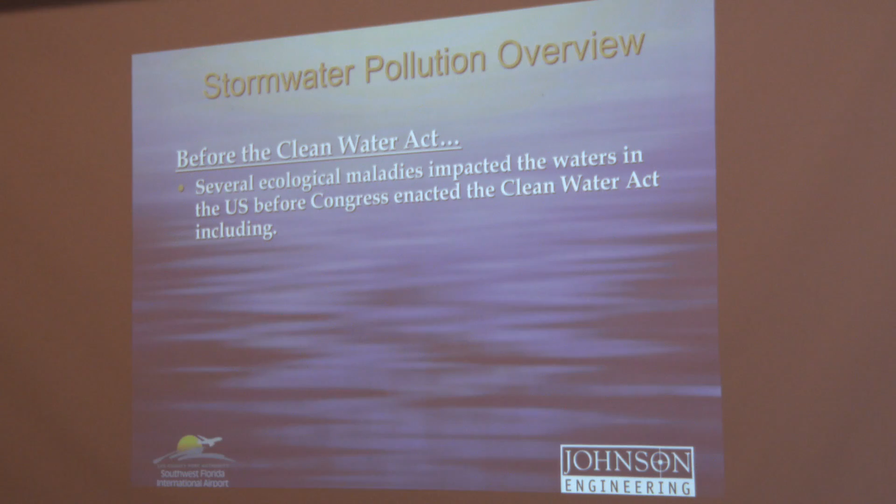Before we jump into the rules and regulations of the Clean Water Act, I'd like to look at a few reasons why it was enacted in the first place. In the years before passing the Clean Water Act, several environmental mishaps occurred which spurred the creation of nationwide water quality laws.

First up, we had kids playing on the beach. Typically, you don't find kids playing on the beach that big of a deal, but in this case, they were running through the fog of DDT sprayers. And in 1968, the U.S. Bureau of Sport Fisheries measured DDT in 584 out of 590 water samples that they took.

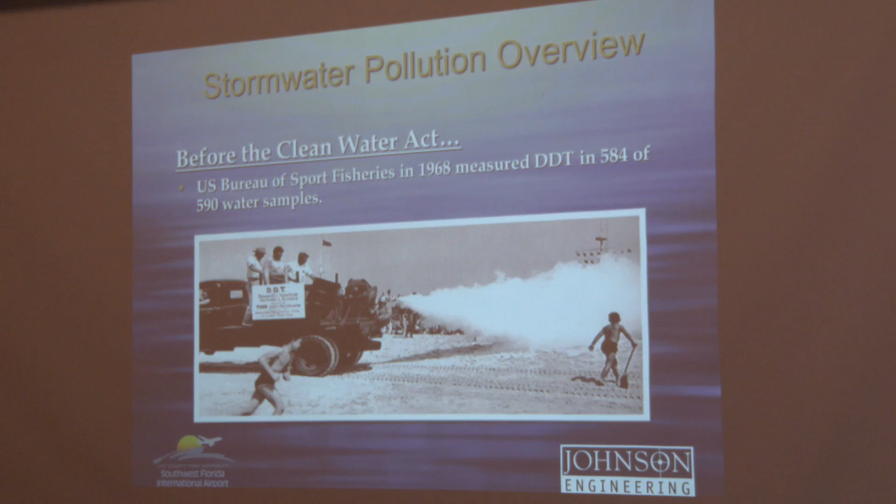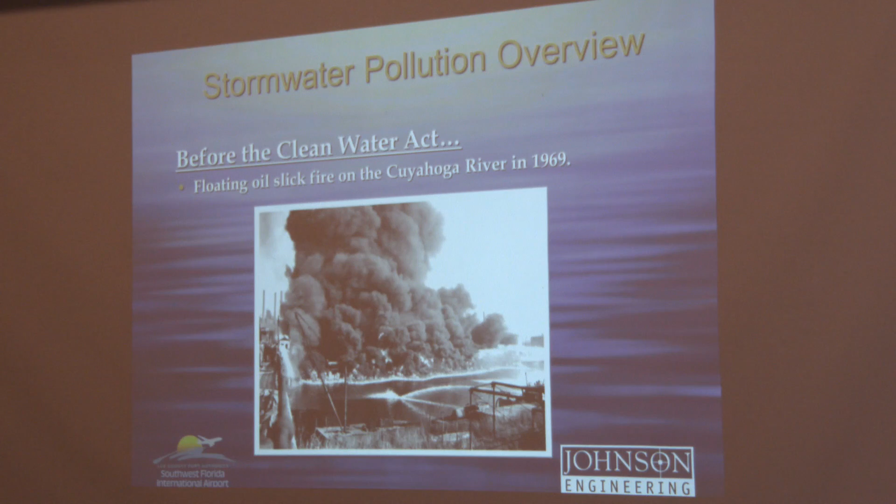In 1969, a river caught fire up in Ohio, the Cuyahoga River, and nobody ever likes when the river catches fire. This floating oil slick burned pretty hot and was one of the big instances to push the Clean Water Act moving forward.

Also in 1969, there were a record number of fish kills measured, including over 26 million killed in Lake Thonotosassa, Florida.

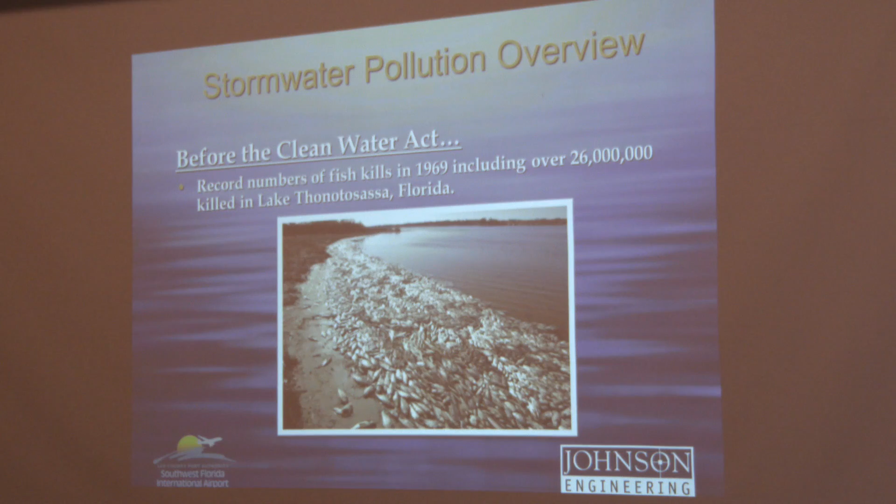And then finally, the Department of Health, Education and Welfare reported that 30% of our drinking water samples in 1970 had chemicals that were exceeding the recommended limits.

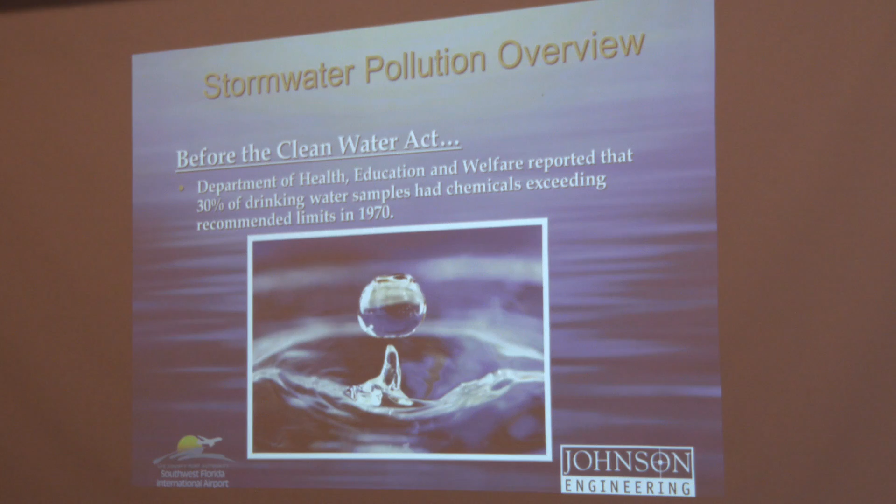So those mishaps set the parameters of what the U.S. did not want for its waters. And in response, Congress passed the Clean Water Act of 1972.

Section 402 of the Clean Water Act authorized the National Pollution Discharge Elimination System, or NPDES, to regulate point source discharges of pollutants. The NPDES performs its duties by requiring permits for industries to discharge stormwater into the waters of the U.S. It's important here to draw attention to the term waters of the U.S.

This is a very broad term that includes streams, lakes, rivers, sometimes ditches, sometimes even stormwater management systems inside a facility. Very broad term, and that's kind of an important factor that will play in as we move forward.

And then in October of 2000, the EPA authorized the FDEP to implement and enforce the provisions of the NPDES program. So now it is a state-enforced program instead of a federal enforced program.

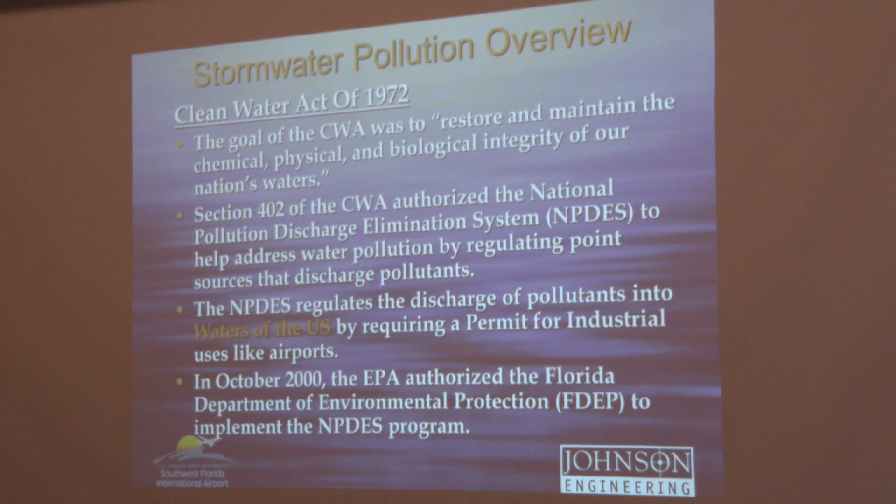There are two types of NPDES permits issued. Individual permits are typically used when a facility is not eligible for coverage under the generic permit. These facilities must develop specific requirements that apply just to their facility, so it's kind of a one-off plan that they have to abide by.

On the other hand, the generic permit is issued for facilities that are able to comply with set established practices. Most industrial activities requiring an NPDES permit likely qualify for a generic permit.

FDEP issues generic permits under the authority of Section 403.0885 of the Florida statutes. And again, FDEP adopted the 1995 EPA Multi-Sector Generic Permit, or MSGP, and EPA authorized FDEP to administer and regulate the NPDES program.

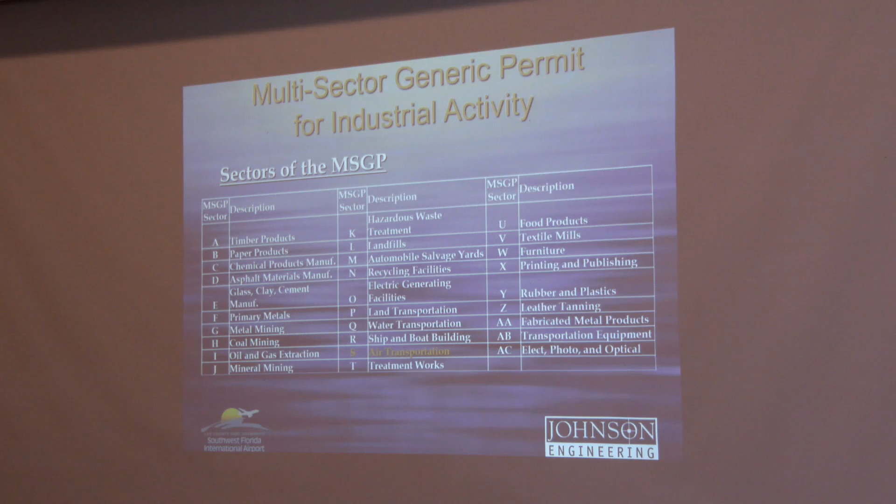All right, so we figured out what generic permit meant, but what does multi-sector mean? These are the sectors of industrial activity covered under the MSGP, and as you can see there under Sector S, air transportation, that includes facilities like this as well as Page Field.

And within Sector S, there are several industrial activities that could potentially lead to the discharge of pollutants into the waters of the U.S. They include fueling, maintenance, painting, stripping, and washing of aircraft, equipment, and vehicles, handling and storage of cargo, chemicals, equipment, and fuel, aircraft lavatory services, waste and scrap metal or out-of-service equipment storage, pavement washdown, pesticide, herbicide use, vehicle parking, and of course the most important one down here is de-icing of aircraft and runways.

Well, we found out that we could apply for the generic permit under Sector S, but there are some steps that had to be taken before we obtained that permit.

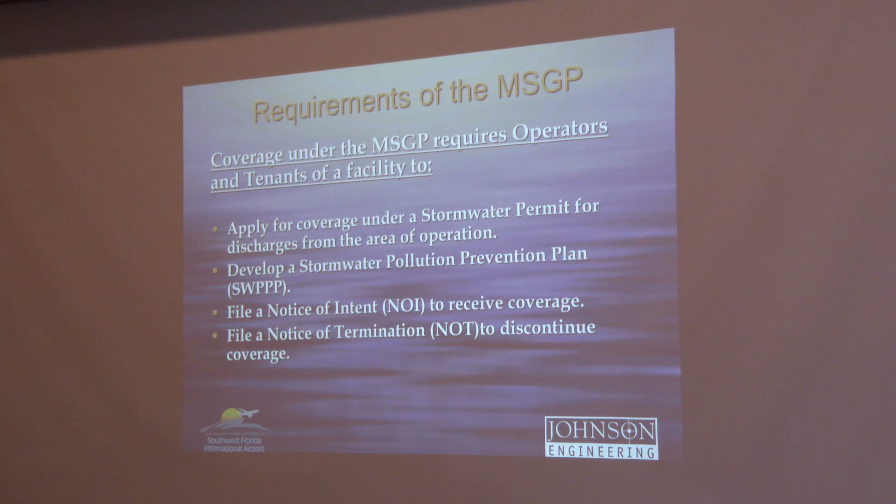LCPA has applied for and received coverage for a stormwater permit allowing discharges of water from the area of operation into the stormwater management system. A stormwater pollution prevention plan was written for RSW and for FMY. A notice of intent to receive coverage was submitted to FDEP, and if for some reason one of the airports no longer needs coverage, they will have to file for a notice of termination with FDEP.

So you guys probably picked up on this stuff pretty quick, but it took me a while to kind of muddle through all of the acts and systems and permits and plans, etc. So here's a quick recap on the regulatory structure.

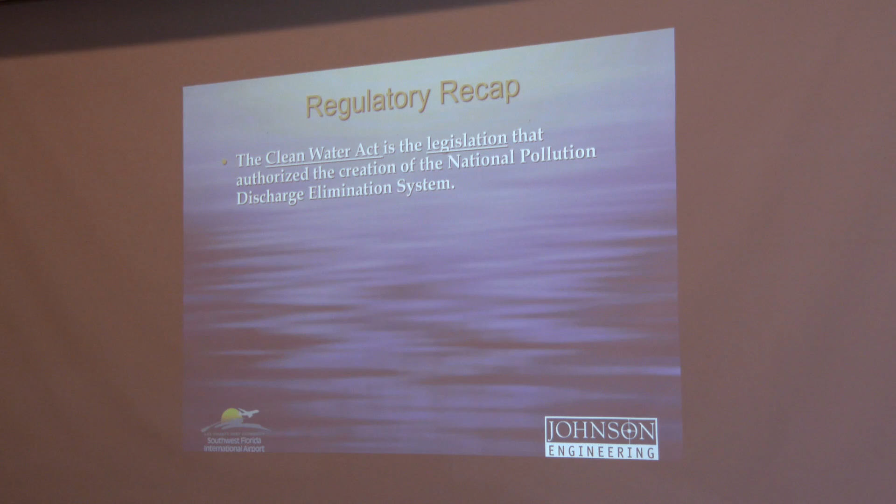The Clean Water Act is the legislation that authorized the creation of the National Pollution Discharge Elimination System. The NPDES is the system used to set pollution discharge elimination goals and is implemented by the FDEP. The MSGP is a state-level permit issued by FDEP that regulates and authorizes our stormwater discharge.

And finally, the Stormwater Pollution Prevention Plan is the LCPA-developed plan to comply with the conditions of the MSGP for this site specifically.

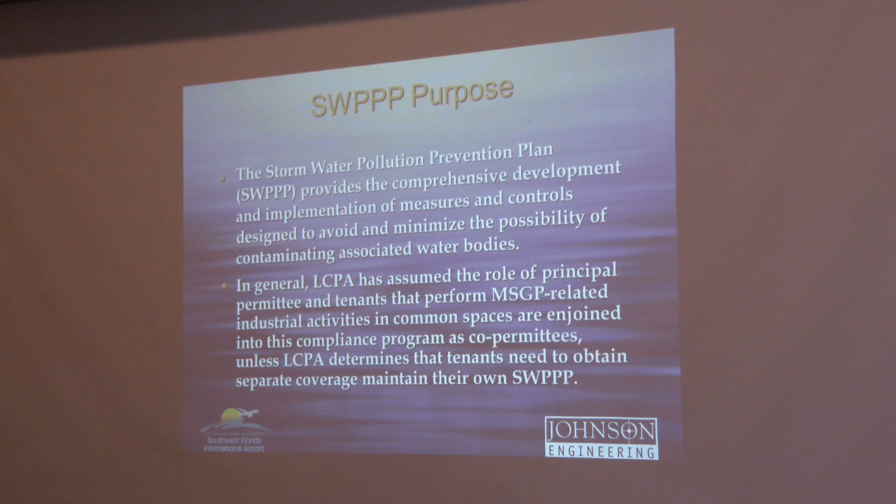The SWPPP is the comprehensive development and implementation document for measures and controls necessary to avoid and minimize the potential for contaminating water bodies. Generally speaking, LCPA assume the role of principal permittee. Tenants that perform industrial activities in common spaces are enjoined as co-permittees unless the LCPA determine that the tenant needs to obtain separate coverage and maintain their own SWPPP.

LCPA has developed and implemented its own SWPPP for several years now and continues to update and implement the plan. The SWPPP is composed of 4 sections. The introduction includes the SWPPP organization, the program approach, the pollution prevention team. The facility description includes the land use descriptions, physiography and climate, and the stormwater drainage system.

Stormwater pollution source ID includes non-stormwater discharges, potential areas of pollutant contact, inventory of materials, historic spills and leaks and sampling data. And the stormwater management controls includes existing controls that we use now, recommended BMPs, and the BMP implementation plan.

The pollution prevention team is composed of program manager along with LCPA staff, tenant staff, and consultant members. The PPT is responsible for maintaining and implementing the SWPPP, disseminating SWPPP information within the organization, training appropriate personnel, and ensuring that records are kept and reporting and notification procedures are followed.

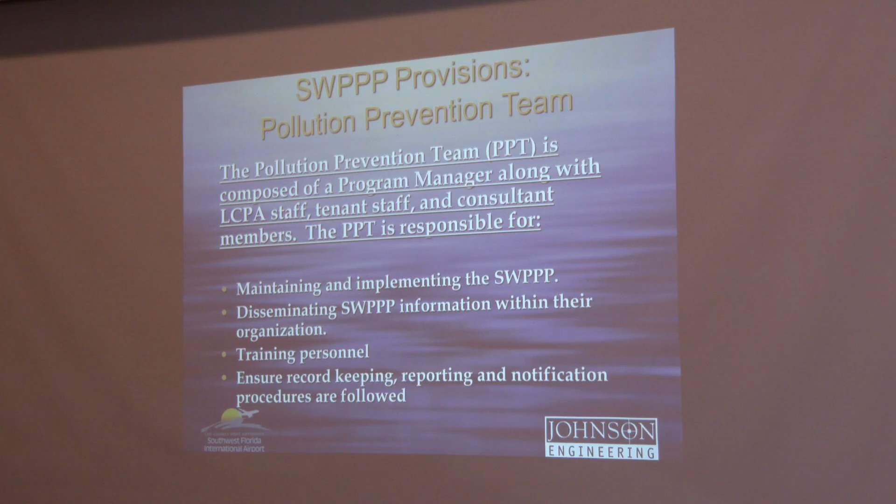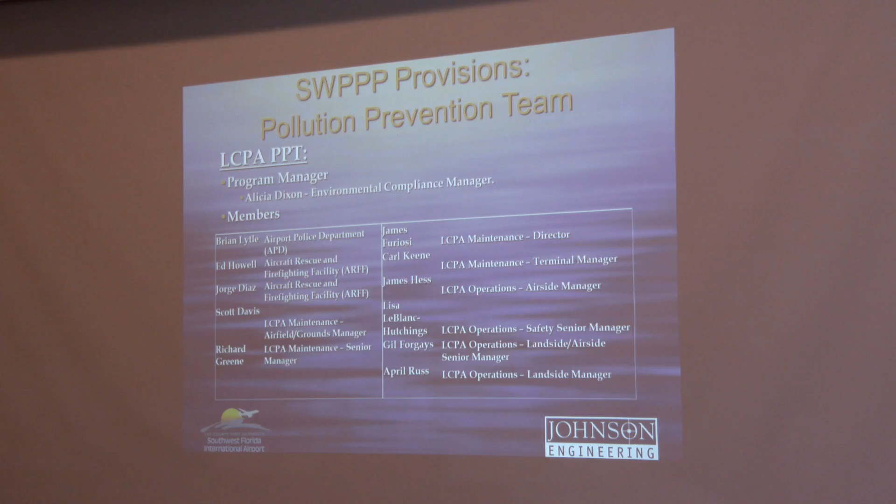The LCPA pollution prevention team for Southwest Florida International Airport is set up here. Alicia Dixon is our program manager. Other departments that are represented include Airport Police Department, ARFF, Maintenance and Operations. In addition to LCPA staff, there are several tenant members.

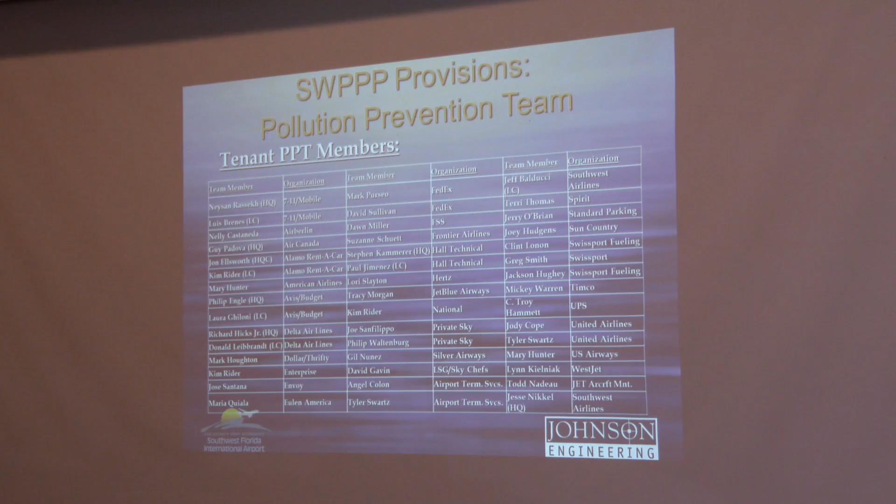Entities represented include 7-Eleven, commercial airlines, rental car facilities, private airlines, food suppliers, fuel companies, freight companies, maintenance companies, and consultants. And if you know of any updates to these lists, please let us know. It's important for us to keep these lists of contacts up to date. Let Alicia know and she can update those lists inside the SWPPP.

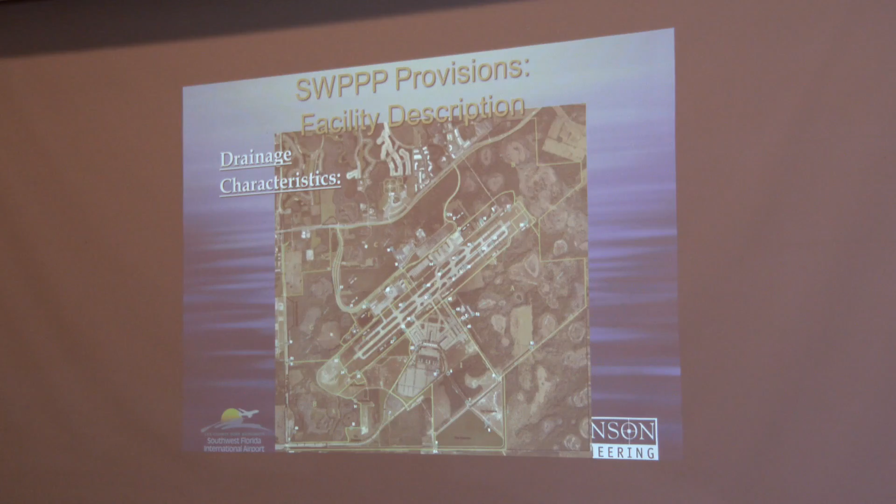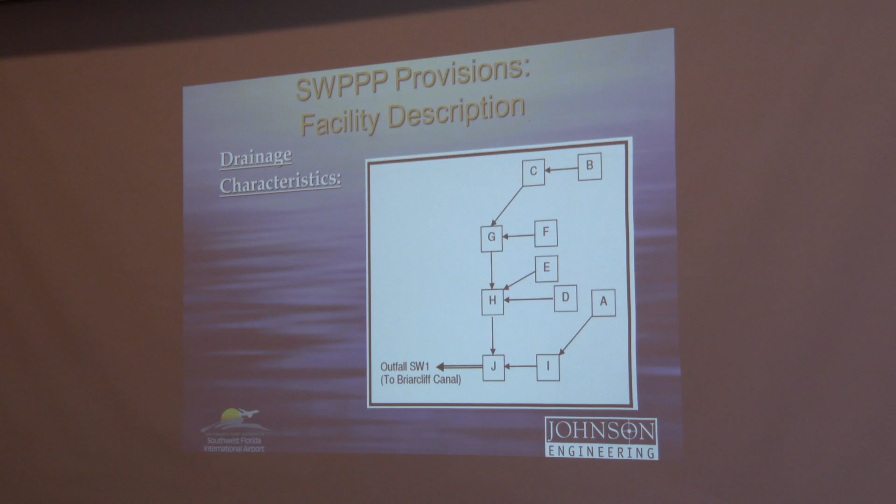More specifically, you can see in this diagram the probable flow direction so that if a spill does occur and does move into the stormwater management system, you can intercept the spill at the next downstream location. Eventually, stormwater reaches outfall SW1, where the airport discharges into the Briarcliff Canal.

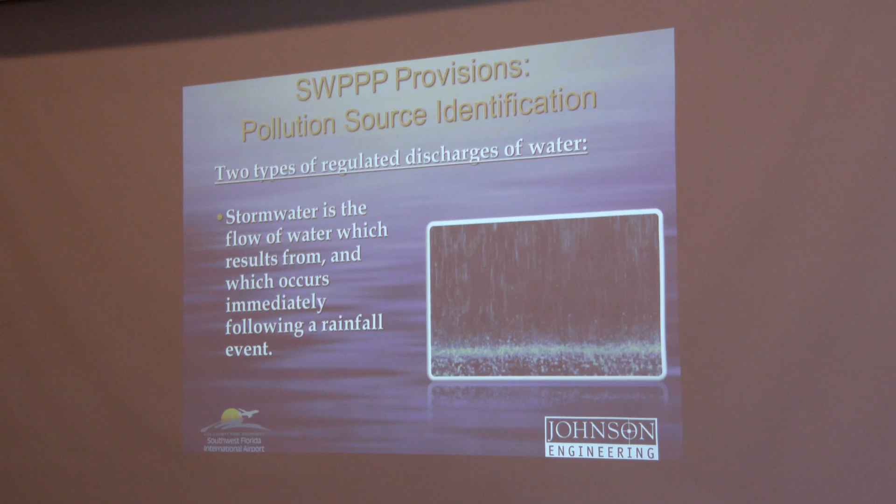Section 3 of the SWPPP provides the stormwater pollution source identification. Digging into the details of the SWPPP, you'll find that there are 2 types of regulated discharges of water. Stormwater is the flow of water which results from and which occurs immediately following a rainfall event.

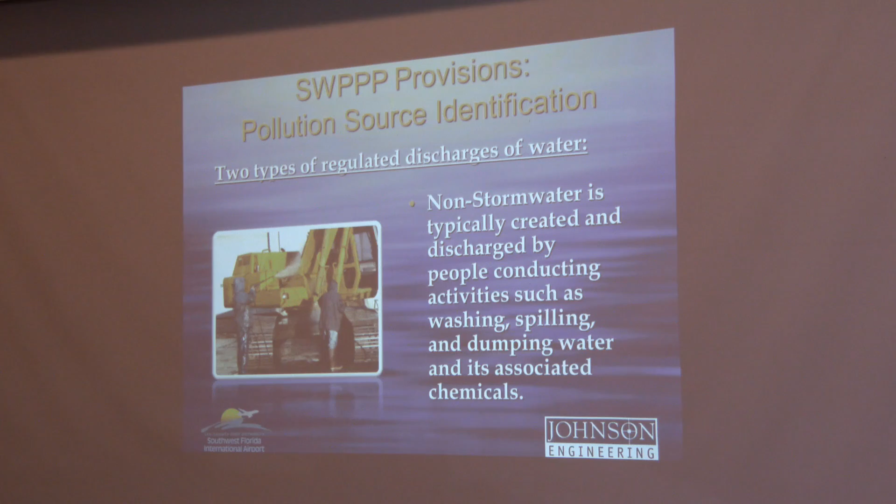And non-storm water is typically created and discharged by people conducting activities such as washing, spilling, or dumping water and its associated chemicals. There are some non-storm water discharges that are allowed, but you can see it's a very specific list. Discharges from firefighting activities are included, along with fire hydrant flushing, uncontaminated compressor condensate and air conditioning condensate, irrigation drainage,

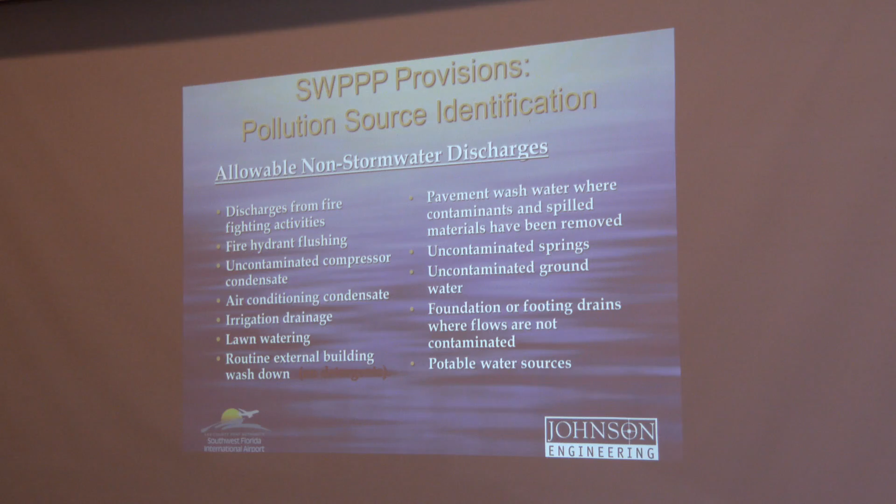lawn watering, routine external building washdown, as long as no detergents are used, pavement wash water where no contaminants are present, uncontaminated springs or groundwater, and uncontaminated foundation or footing drains, along with any potable water source.

So everybody here loves clean equipment, right? I know that you do. I've seen it. You drive around here and everybody's truck looks great. So what do you think about these guys cleaning their equipment?

Is this an allowable discharge of stormwater? Just throw it out. Anybody? No? Probably not? They're probably not, unless they're catching all of that water and treating it appropriately. And the reason is there's grease, there's oils on this piece of equipment that are going to get sprayed off and washed into the system.

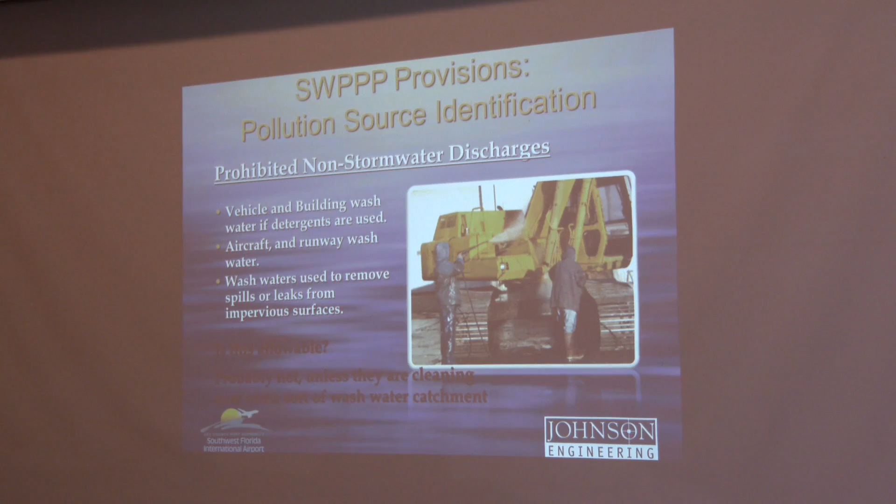I know it's tempting to wash your vehicles to keep them clean, but you need to remember that the airport is regulated differently than we are at home. The effect of so many vehicles being washed in proximity to sensitive areas means that you should use a commercial car wash service. So please be responsible, like these two guys here, and make sure that you use commercial car wash services when you clean your Port Authority vehicles.

Continuing on with pollution source identification, we have stormwater discharges. A stormwater discharge of pollutants occurs when an industrial activity leads to a pollutant being spilled onto the ground, and then the rain washes that pollutant into the stormwater management system.

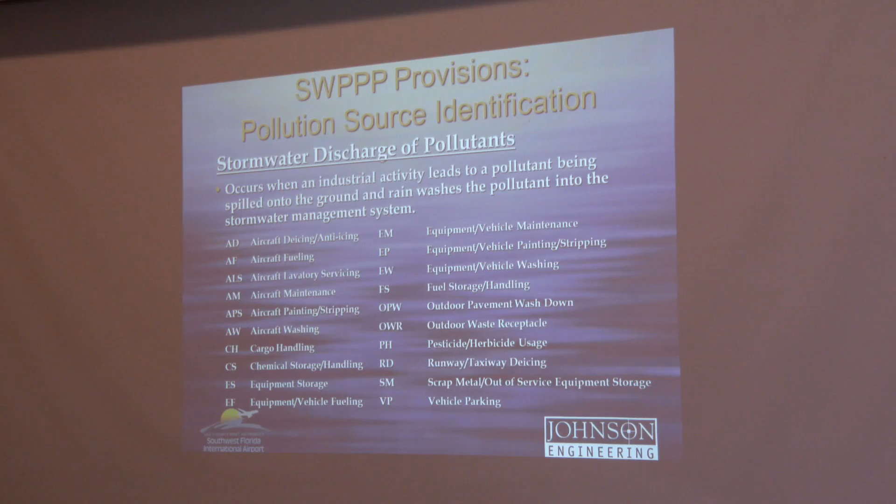The potential sources of pollutants that could be discharged into the stormwater system are organized by activity type, and they include aircraft de-icing or anti-icing, aircraft fueling, aircraft lavatory servicing, aircraft maintenance, painting and stripping, and aircraft washing, cargo handling, chemical storage and handling, equipment storage, equipment or vehicle fueling, maintenance, painting and stripping, equipment and vehicle washing, fuel storage, outdoor pavement washdown, outdoor waste receptacles, pesticide and herbicide use, runway and taxiway de-icing, scrap metal and out-of-service equipment storage, and vehicle parking.

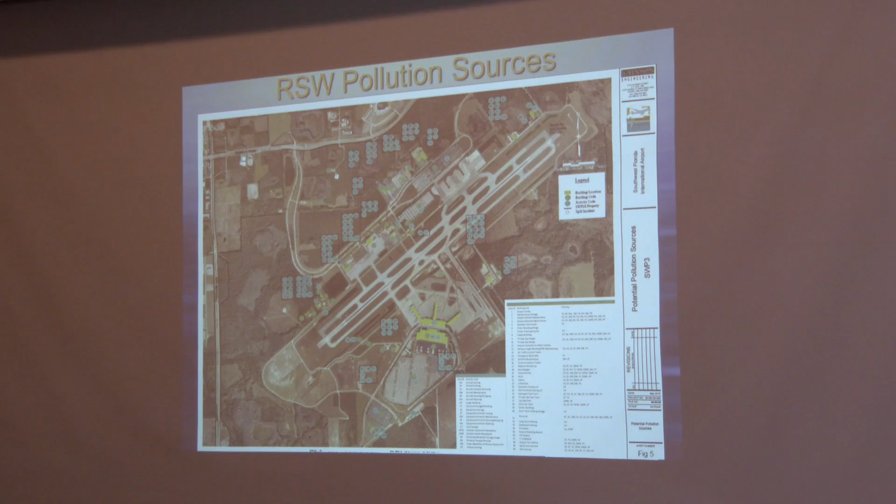All right, here's a map of RSW showing the areas of the airport where spills are likely to occur, along with the activities that might cause those spills. And I'm sure that your eagle eyes are picking up every single detail on there, right? No need to go into it further. All right. We can zoom in a little bit to each area and see the activities that are performed that could potentially lead to the discharge of pollutants.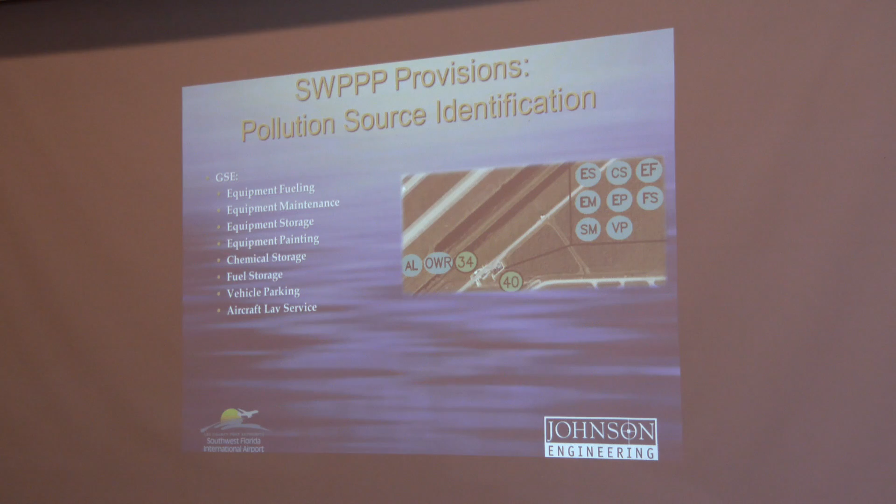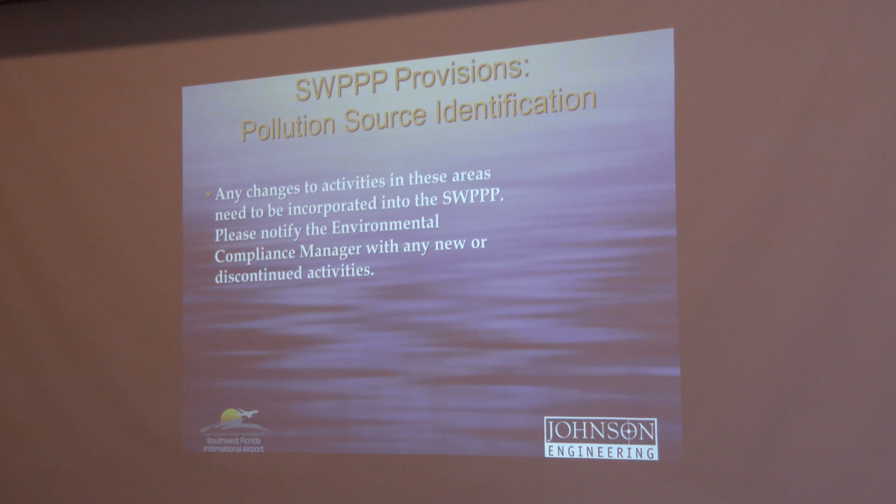And the reason I showed those to you so specifically is so that you understand that any changes to the activities in those areas need to be included in the SWPPP. It's not that big of a deal if an activity comes up or gets removed from those areas, but the SWPPP does need to be updated. So any of those changes need to be forwarded to Alicia so that she can put a note in the SWPPP so that we can keep that document up to date.

All right, so how much pollutant are we talking? You're going to have to interact with me on this one, so help me out a little bit. Let's start with Jet A. How many gallons of Jet A can be stored on RSW? Anybody throw out a number? Right at, keep up with me, 1.7 million gallons of Jet A. Gasoline is our next big guy. Anybody have a guess of gasoline on site? 10,000? 200,000. 200,000, I like that one. 178,000 gallons of gasoline stored on site.

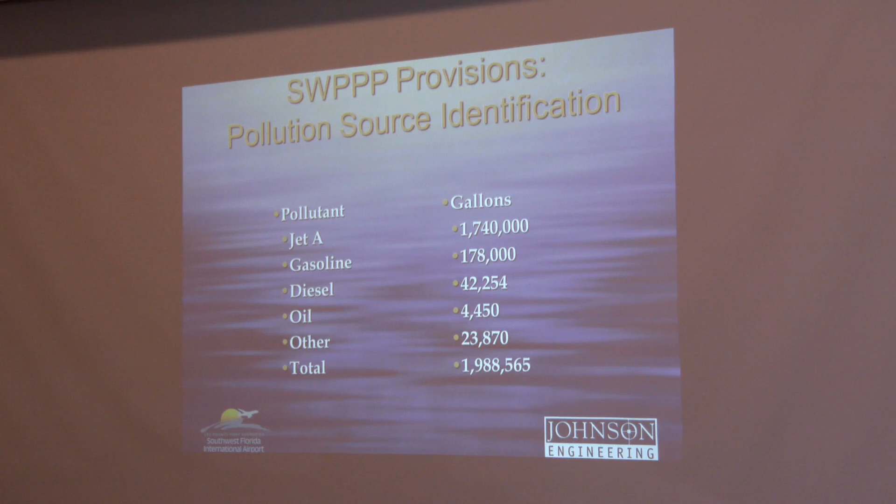Diesel fuel is up next. 300,000? 75. About 42. Oil at about 4,500 gallons. And then other pollutants that we store here on site, just under 24,000 gallons. All right, so for some perspective, that gives us a total of just shy of 2 million gallons of pollutants that we store on site every day, or we have the capacity for on site.

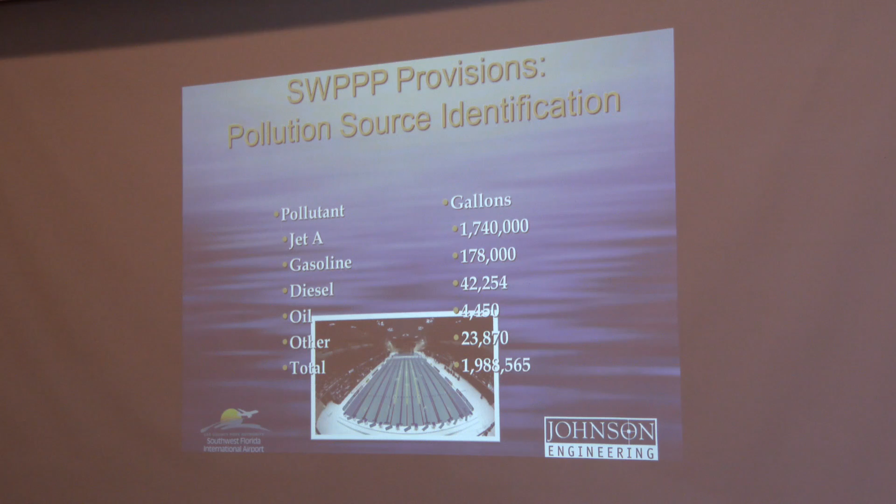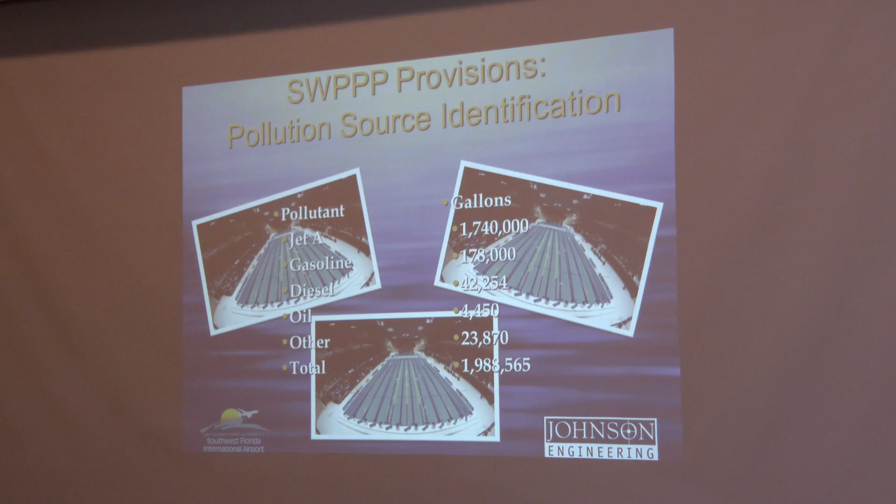All right, just for a little comparison, a little perspective, a 50 meter by 25 meter by 2 meter deep Olympic-sized swimming pool holds about 660,000 gallons of chlorinated water, meaning that the airport has the capacity for right at 3 Olympic-sized swimming pools of pollutants stored on this site every day.

All right, so how do we stop 3 Olympic-sized swimming pools worth of pollutants from entering our waterways? Well, we develop, implement, monitor, and report on appropriate controls. The BMPs in the SWPPP can be classified as either source controls or structural controls.

A source control is a procedural or a work practice. This is an active control and it requires a trained human to take action for it to work. They require on-site decisions and trainings, and they're only available when someone's present.

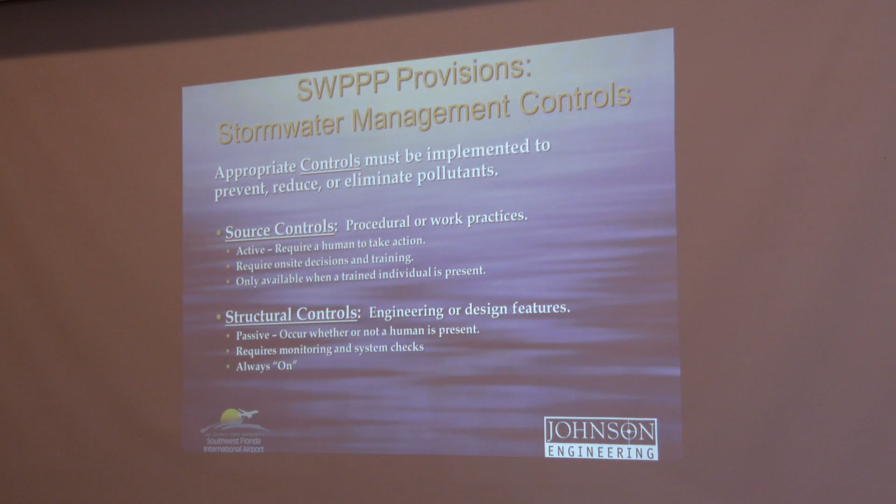A structural control is typically an engineering or design feature. These are passive and they occur whether someone is there to help the situation or not. They do require regular monitoring, maintenance, and systems checks, but these services are always on. Most of you probably play a role in both types of controls, whether it's inspections of alarms, sight glasses or sensors, or cleaning up after a quart of oil has spilled on the ground.

Controls are also known as best management practices. A best management practice is a device, a method, practice for removing, reducing, retarding, or preventing pollutants from reaching the receiving waters. And we find these best management practices stashed away in Appendix E of the SWPPP. These BMPs, again, are organized by activity type. These are the areas and activities where BMPs have been developed.

I'm not going to read through them now because I'm going to read through them very slowly and monotonously in the next few minutes. Please don't hurt your forehead on the desk in front of you.

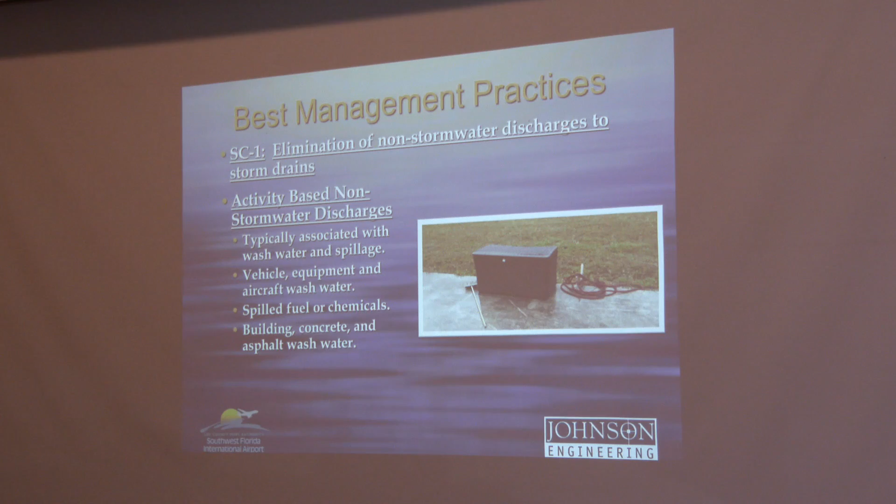All right, we're going to start off with SC1, elimination of non-stormwater discharges to storm drains. Non-stormwater discharges can be classified as activity-based or overt. An activity-based non-stormwater discharge is typically associated with wash water and spillage. It can include vehicle, equipment, and aircraft wash water, spilled fuel or chemicals, or building concrete or asphalt wash water.

An overt non-stormwater discharge is typically an illicit pipe connection that may include processed wastewater, treated cooling water, or sanitary wastewater. Structures that can be piped illicitly include oil water separators, interior floor drains, utility sinks, and chiller and boiler overflow blowdown lines.

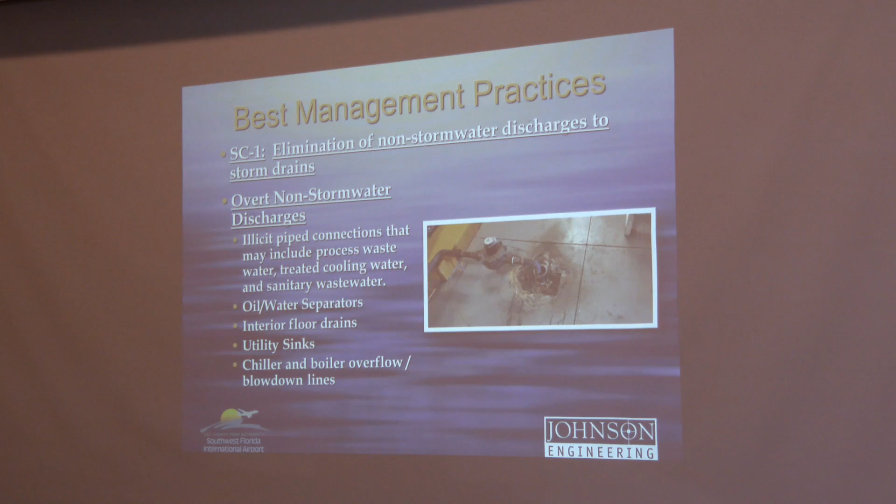This photograph shows something you could look for that could be a potential illicit connection. This is actually in the chiller building here at RSW, but in fact this connection goes right to the sanitary sewer as a permitted connection. So we weren't able to ding you guys for that one. Maybe next time.

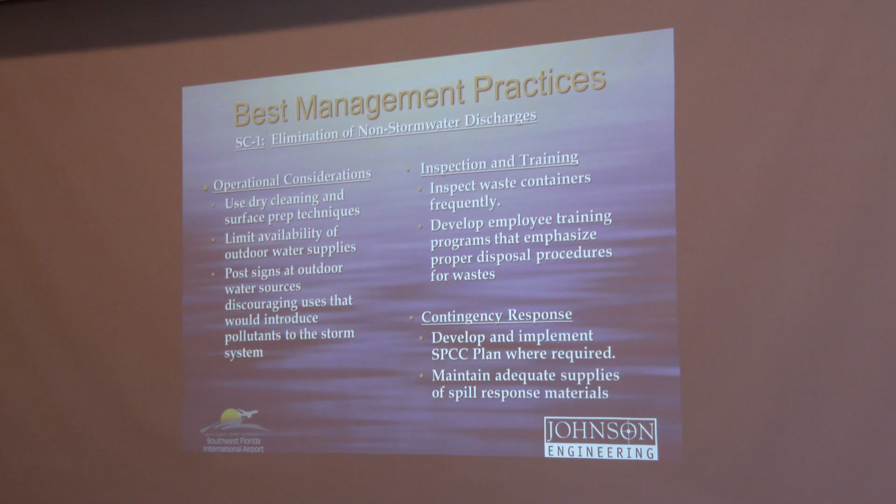Operational considerations for the elimination of non-stormwater discharges include using dry cleaning and surface prep techniques where you can, limiting the availability of outdoor water supplies, posting signs at outdoor water sources, discouraging uses that could introduce pollutants, inspecting waste containers frequently, developing employee training programs that emphasize proper disposal procedures, developing and implementing an SPCC plan where required, which we're going to talk about a little bit later today, and maintaining adequate supplies of spill response materials.

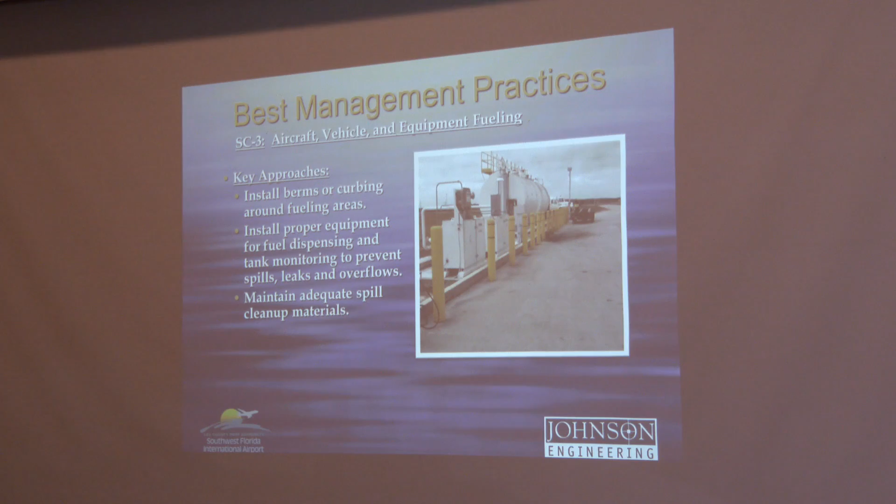SC3, aircraft, vehicle, and equipment fueling. Key approaches here: installing berms or curbing around the area to keep the fuel where it's supposed to be, installing proper equipment for fuel dispensing and tank monitoring to prevent spills or overflows, and maintaining adequate spill cleanup materials at all sites.

Additional considerations include discouraging the topping off of tanks, using absorbent materials to clean up small spills, properly disposing of liquids and cleanup materials, inspecting, cleaning, and maintaining the sumps and oil water separators, routinely inspecting drainage valves and monitoring equipment, and regularly inspecting fuel areas and storage tanks.

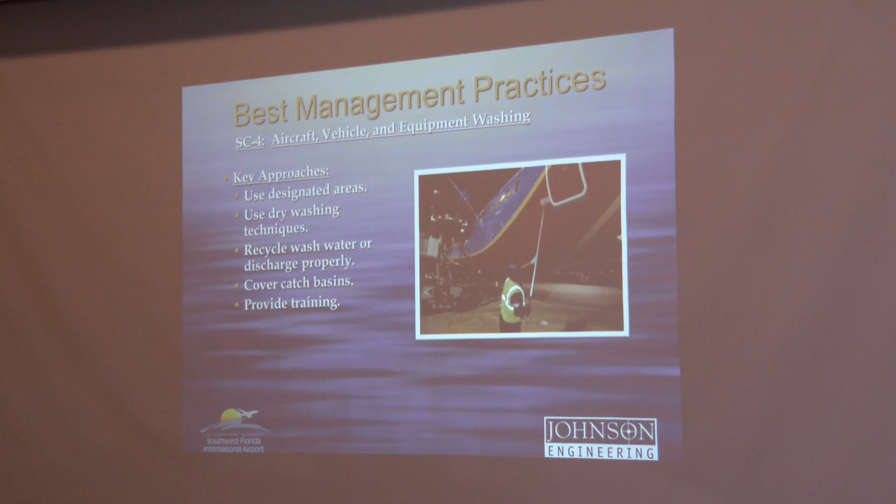SC4, aircraft, vehicle, and equipment washing. Key approaches here include using the designated areas, using dry wash techniques, recycling the wash water appropriately, covering catch basins, and providing employee training.

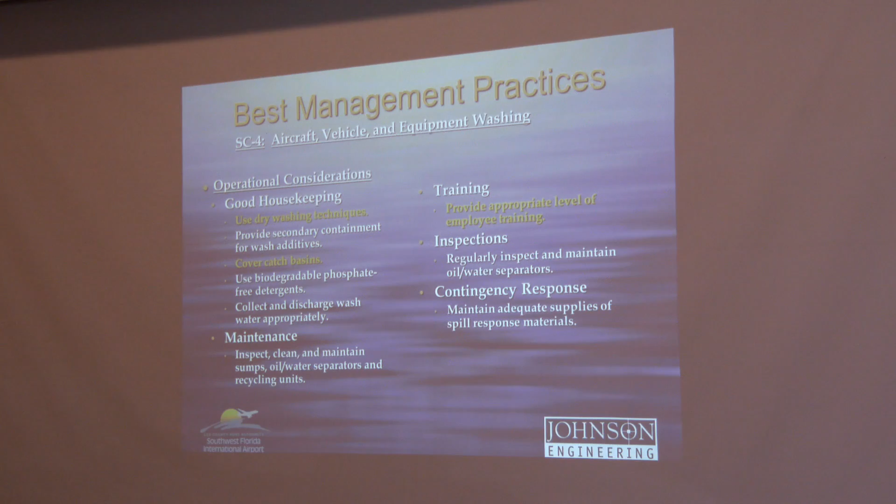Additional operational considerations include providing secondary containment for wash additives, using biodegradable phosphate-free detergents, collecting and discharging wash water appropriately, inspecting, cleaning, and maintaining your sumps and oil water separators, and maintaining adequate supplies of spill response materials.

Moving on to SC6, material handling.

One of the big items here to pay attention to is where the storm drains are located compared to where you're conducting these material handling operations. A spill that happens on asphalt or concrete, 50 gallons, even 100 gallons, is a lot easier to deal with and clean up than the same spill right next to a storm drain or a pervious surface. So please make sure these material handling activities are performed away from those storm drains.

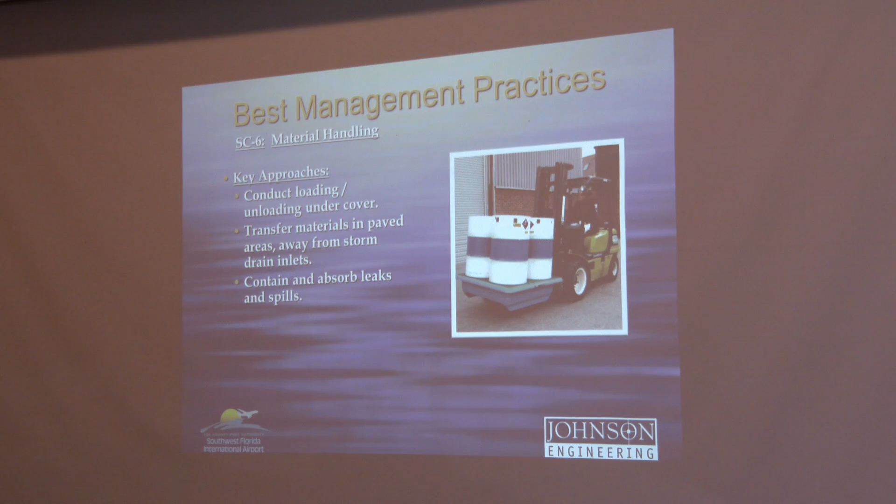Additional operational considerations include using drip pans where you can, maintaining spill supplies, and including spill kits on the material handling equipment themselves.

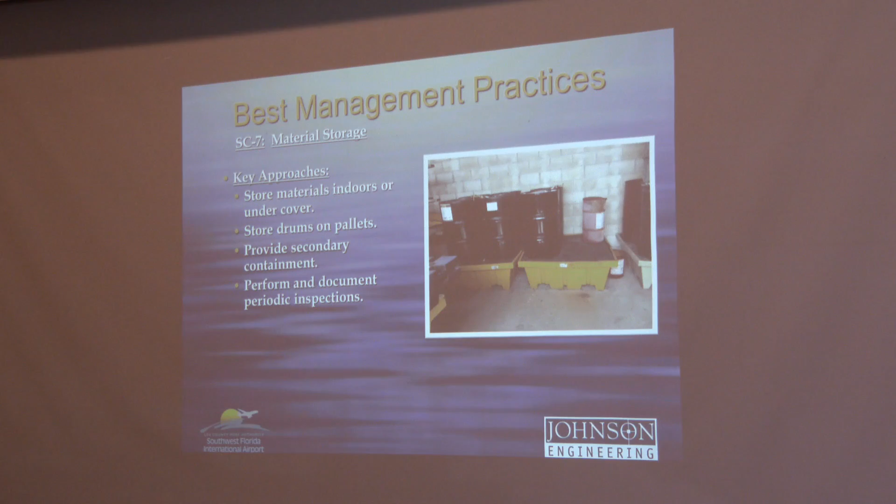SC7, material storage. Key approaches include storing materials indoors or undercover, storing drums on pallets and providing secondary containment, and performing and documenting periodic inspections.

Additional operational considerations include avoiding dispensing from horizontal drums. During our inspection, we didn't see any horizontal drums used here on site, and hopefully you guys keep it that way.

Using drum lids to prevent rainfall from washing materials into the storm system, storing materials in their original or approved containers, properly labeled containers, reducing the quantities of materials stored on site or outside, providing appropriate training materials, maintaining spill supplies, and posting appropriate signage at all chemical storage areas.

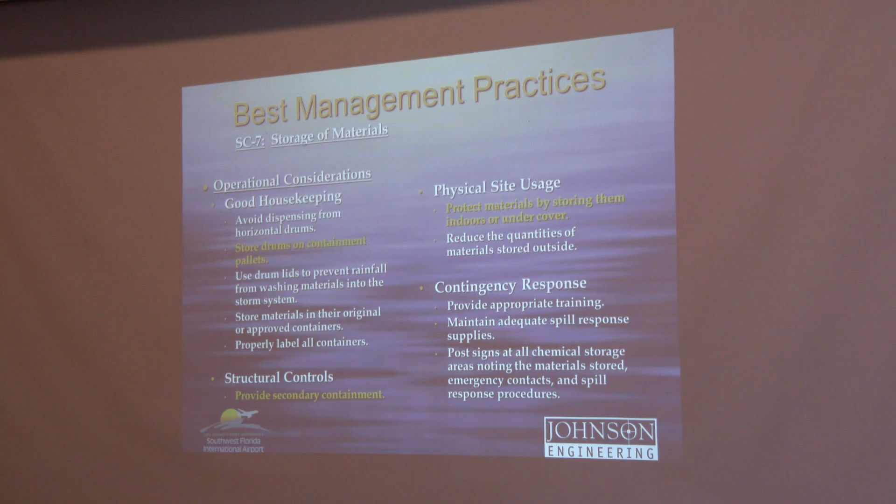About halfway through, guys. Stay with me.

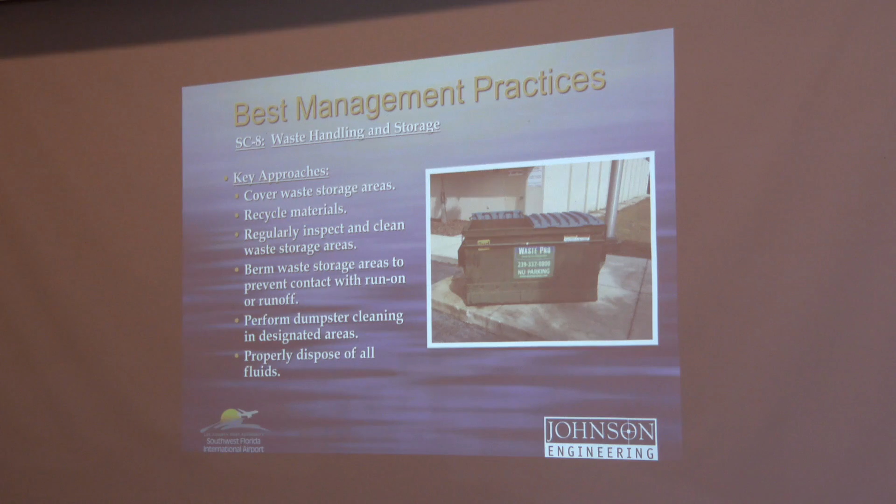SC8 is waste handling and storage. Key approaches here include covering the waste storage areas, recycling as much as you can, regularly inspecting and cleaning the waste storage areas, berming the areas to prevent contact with stormwater run on or run off, performing dumpster cleaning activities in designated areas, and properly disposing of all fluids.

Additional considerations include regular housekeeping activities. Make sure you use covered dumpsters and keep those lids closed. That's a big one. Only use dumpsters with plugged drain holes. Segregate your wastes, and perform and document periodic inspections of hazardous and non-hazardous waste storage areas.

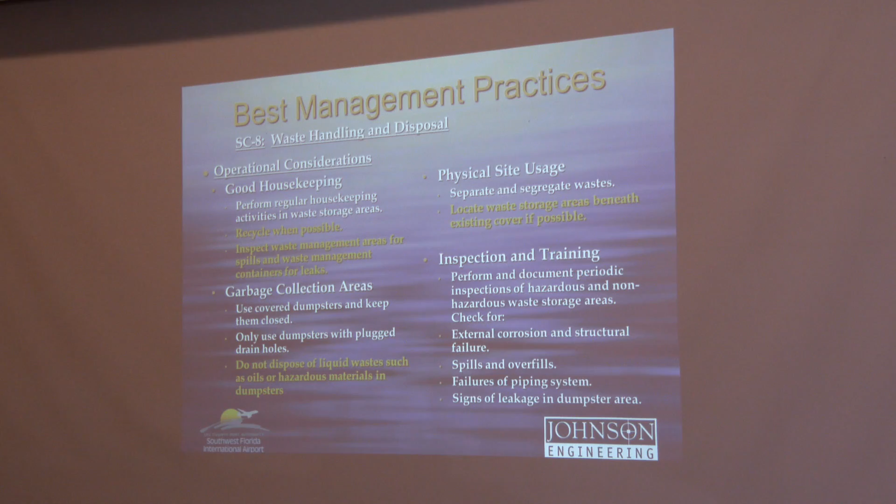And while you're doing that, check for external corrosion, structural failure, spills, overfills, failures of any piping system, or signs of leakage in the dumpster area.

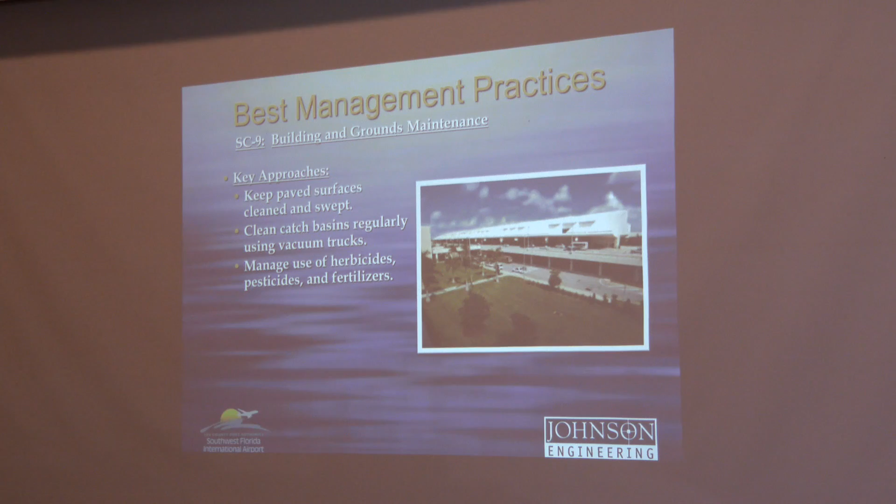SC9 is building and grounds maintenance. Key approaches here include keeping the paved surfaces clean and swept, cleaning the catch basins regularly, and managing the use of herbicides and pesticides.

Operational considerations also include collecting outdoor wash water and disposing of it properly, utilizing integrated pest management systems where you can, properly disposing of landscape waste, sweepings, and sediments, and maintaining adequate supplies of spill response materials.

SC10 is stormwater pollution prevention education. Key approaches here: perform inspections and enforcement regularly, provide training for employees, which luckily we're doing right now, and promote education to the vendors and the public.

SC11 is lavatory service operations. Key approaches: do not discharge lavatory waste into the sanitary sewer connection other than at the triturator. Utilize buckets or pans to capture drips. Don't perform lav truck clean out or flushings at any location besides the triturator, and carry absorbent and other cleanup and containment supplies on the lav service equipment.

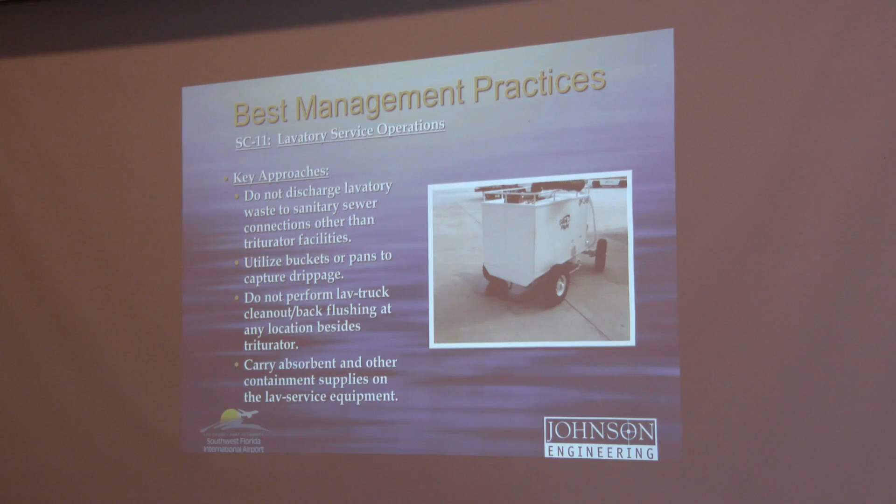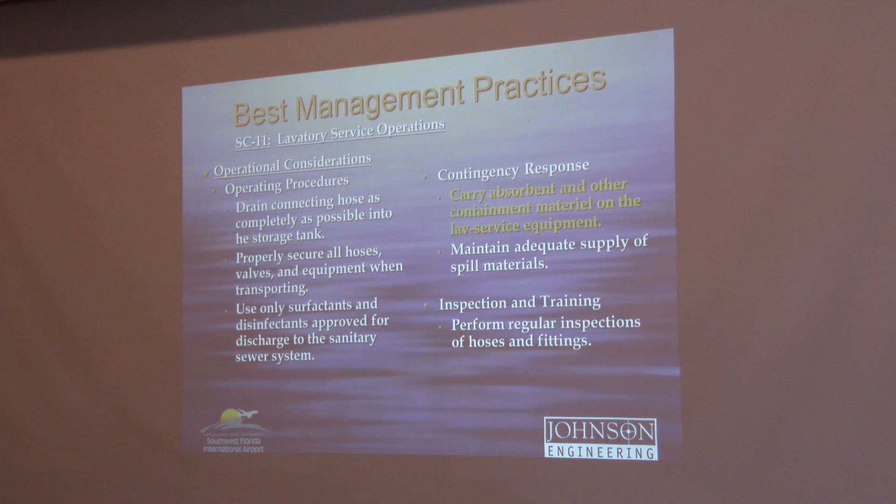Additional operational considerations include draining the connecting hoses as completely as possible into the storage tank, properly securing all the hoses, valves, and equipment when you're moving them. Use only surfactants and disinfectants approved for discharge into the sanitary sewer system. Maintain your adequate supply of spill materials, and perform regular inspections of hoses and fittings. Make sure we don't spill that stuff on the ground.

SC12, equipment degreasing. Key approaches include using biodegradable, phosphate-free degreasers, using a designated degreasing area and keeping the area clean and free of waste, and including proper signage to prohibit the discharge of waste oils.

SC13 is firefighting foam discharge. Key approaches here is perform the testing in designated areas, properly dispose of waste foam, and service your sumps regularly.

All right, SC14, aircraft sump fuel management. Key approaches here include strategically deploying mobile collection tanks, deploying signage instructing maintenance personnel and pilots to dispose of wing test fluids appropriately, deploying spill kits, and using absorbent materials or vacuum equipment to clean up spills quickly.

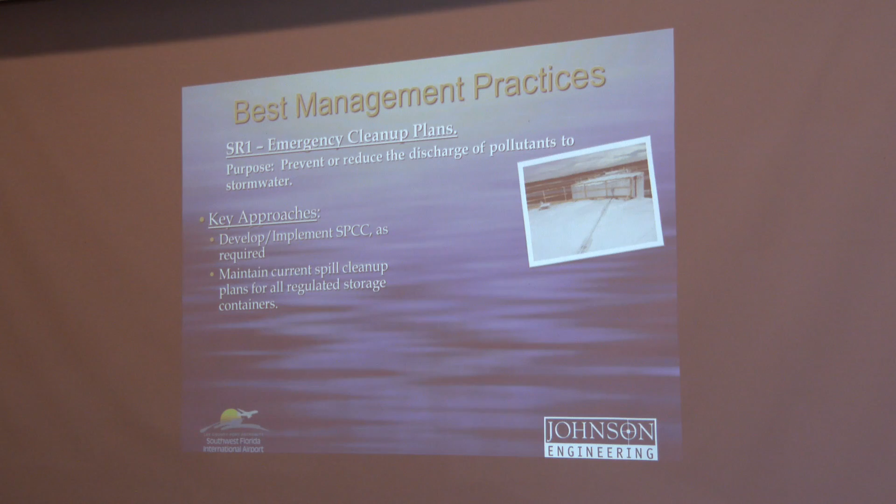That brings us into SR1, which is emergency cleanup plans. Appendix D of the SWPPP provides the RSW spill response and reporting procedures. Key approaches include developing and implementing a spill prevention, control, and countermeasures plan, which we're going to have to go over a little bit later. Maintaining plans for all regulated storage tanks, from the 420,000 gallon Jet A tanks that we have here on site, down to 2,000 gallon diesel tanks, 500 gallon oil tanks, all the way down to 55 gallon drums.

Also provide training for employees and follow spill response procedures found in Appendix D of the SWPPP.

The best way to comply with SR1 is to remember the 3 R's. First, recognize that there is a spill. This may seem easy when it's something big, but remember that 1 drop of oil released into the waters of the U.S. is considered a discharge. So you have to recognize the little leaks too.

Second is respond to the spill. This includes getting the leak or spill stopped before you initiate cleanup activities. And finally, we have report the spill. Report the spill to your supervisor and try to take note of what chemical is spilled, how much, and what you did to clean the spill.

Digging a little deeper into these guys on recognizing the spill. There are a lot of different types of spills out there. Sometimes it's easy to see a spill but not recognize it. And here are some examples.

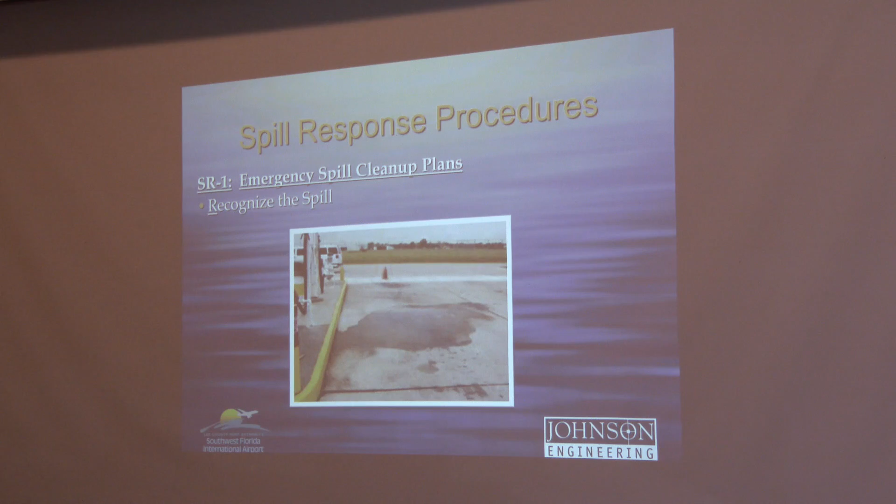This is an unknown spill next to a fueling island. A good idea that it's probably gasoline, but don't necessarily walk by it. If you see something like this, you need to recognize that this is a spill and do the investigation.

A lot of times equipment will have little leaks, little drips. This is out on the tarmac next to a luggage cart. And a lot of times pieces of equipment have little leaks. None of us run 100% all of the time. So when you do see these leaks, take note of them and actually do something about it so that they don't become worse. If you can do it safely, evaluate the spill volume. Make sure it's not still spilling. How much more might be spilled, and can it reach a storm drain or an unpaved area?

Next up, responding to the spill. You may need additional PPE to respond to the spill. Your first priority needs to be to stop the spill before you begin cleaning. It's counterproductive to clean up your spills before you're finished making them. It's kind of like waxing your car right before your buddy tries to pound out a dent.

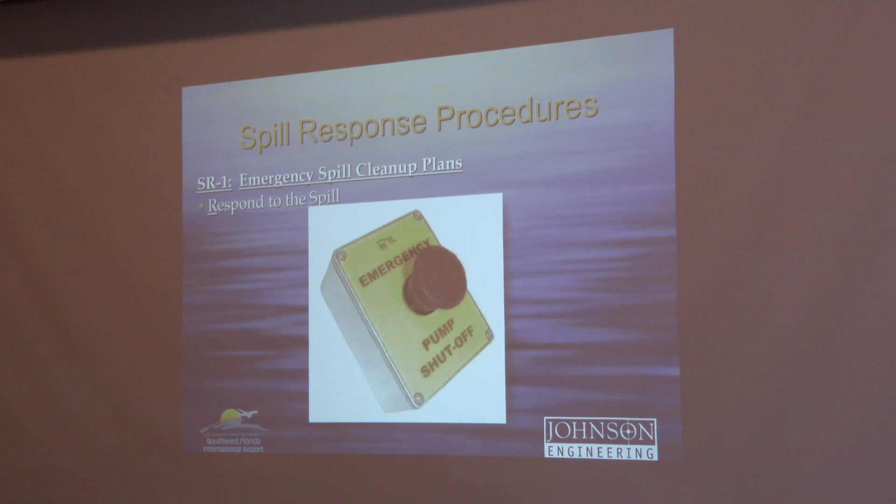Stopping the spill can range from fixing small hydraulic leaks at vehicle maintenance, righting an overturned drum, or closing an appropriate valve, or hitting the emergency shutoff button. Once the spill is stopped, evaluate the spill to see what direction it is traveling. Your next priority needs to be to stop the spill from reaching a storm drain, ditches, or unpaved areas. Drain covers and booms can be used to protect these sensitive areas or to direct the flow of the chemical into a more manageable direction.

When you're sure the leak is stopped and it cannot reach an environmentally sensitive area, use your spill response materials to absorb the spill and clean up the spill. Dispose of all used spill materials appropriately. And remember that the sooner you stop the spill and clean it up, the easier and cheaper the cleanup activities will be.

I know a lot of guys, when an inspector comes around, they hate being photographed. When I was out doing the annual inspection this year, this forklift here in the back blew a hydraulic hose, and as me being the inspector rolled up, everybody scattered like flies. It was horrible. But eventually guys got in there and started taking care of it, and I appreciate that these guys did everything right very quickly, got the spill stopped, got it cleaned up, and disposed of the equipment very quickly, even with the inspector sitting there taking photographs.

So I appreciate you doing your job there.

If you need assistance with the cleanup, contact Aircom Central. They'll forward that request to airport line departments. But Aircom Central does need some information at a minimum. They're going to need the location of the spill, the substance spilled, the approximate quantity spilled, and the status of the spill. Is it continuous or not? Is it stopped?

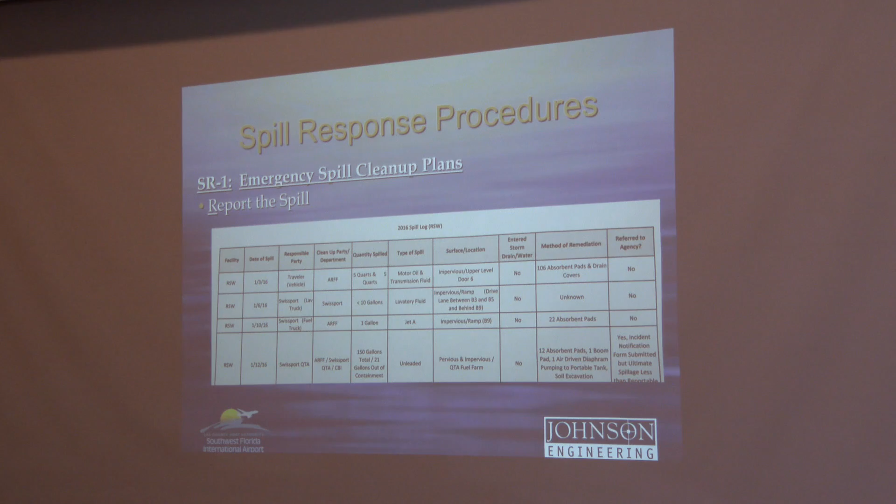That information gained at the spill site is incorporated into our spill log, and it's incorporated into the SWPPP by the Environmental Compliance Manager. Remember that the RSW spill log includes spills ranging from a quart of material spilled up to hundreds of gallons. There is no harm in logging a spill when it's been properly cleaned up. The Environmental Compliance Manager will make the decision when to report those spills to state or federal agencies.

The last BMP, TC1, is oil water separators. Key approaches include frequently inspecting and cleaning the separators and replacing absorbent pads as needed.

Additional operational considerations include shutting the effluent shutoff valve during any cleaning operations. Any standing water that is removed during the cleaning must be disposed of properly and be replaced with clean water to prevent oil carryover. Performing and documenting all of your regular inspections and maintenance operations, and developing a written operating, sampling, and reporting procedure under local stormwater authority guidelines.

All right, that moves us into monitoring and inspections. As we indicated earlier, many of the control measures used to keep pollutants from entering the waters of the U.S. are passive in nature and work even if there is no one present. However, it is critical that these structural source controls are inspected and maintained on a regular basis to ensure that they're working properly.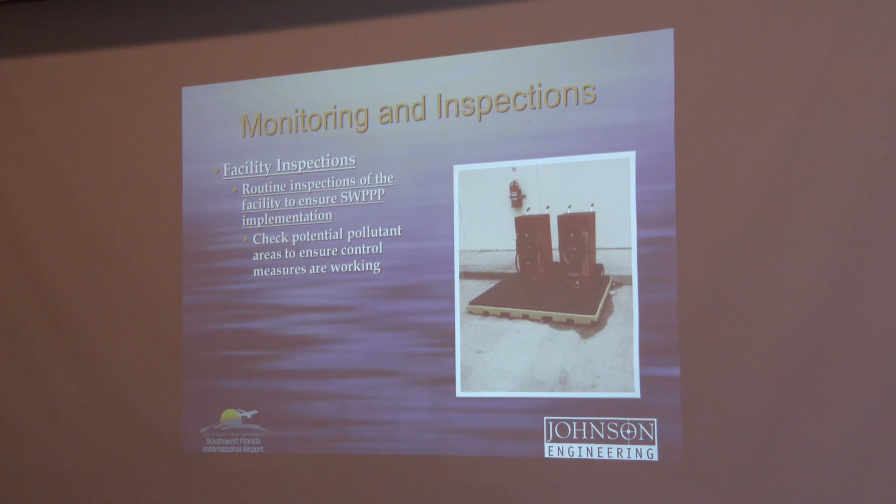Also need to identify control measures that need repair or replacement. Like I said earlier, keeping your dumpsters closed is a big deal. Sometimes it's difficult to open those dumpsters, or to close the dumpsters once you've put a big load of material into the bin, but it's a lot more difficult to close the dumpster when there's no lid on it or if the lid is broken. So if you see stuff like this, go ahead and report it and get that dumpster lid fixed.

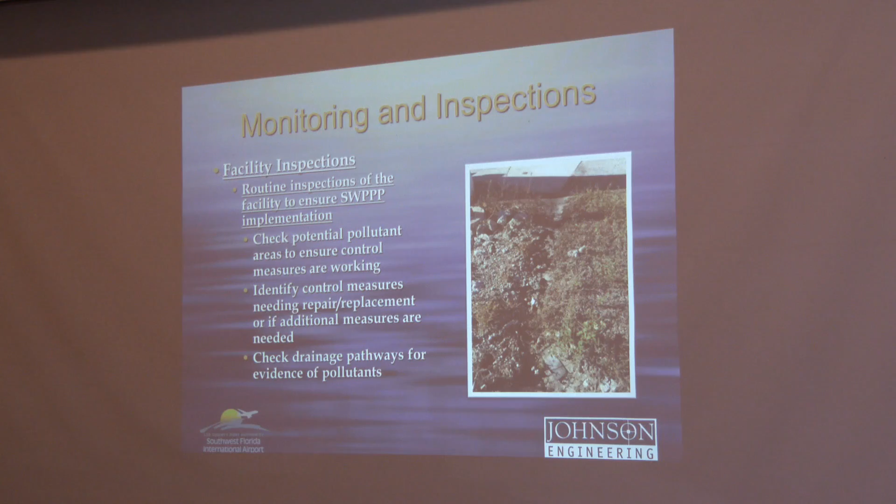And then check drainage pathways for evidence of pollutants. This is a little rill that was established by the trash compactor facility. This is just a small erosion area caused by stormwater that could potentially get pollutants into the stormwater management system.

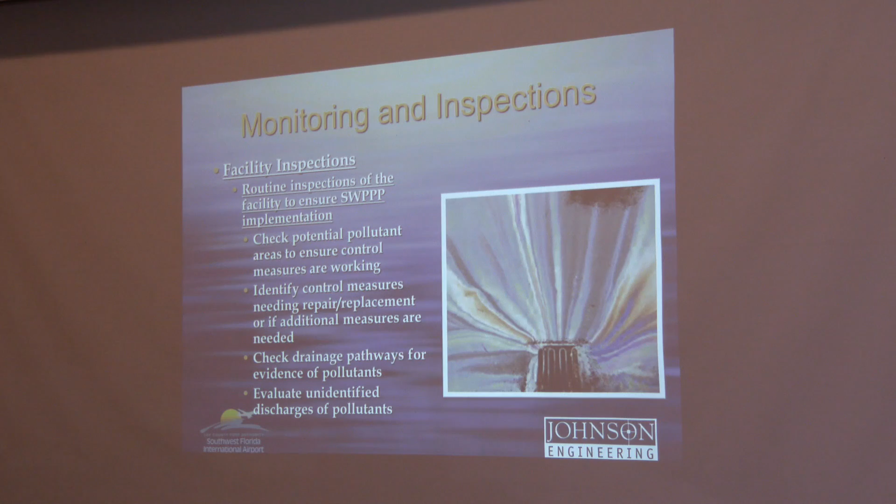And part of the regular monitoring and inspections has to include the evaluation of the SWIP implementation itself. Is the SWIP being implemented by LCPA and tenant staff appropriately? And that's where the annual site compliance evaluation comes in.

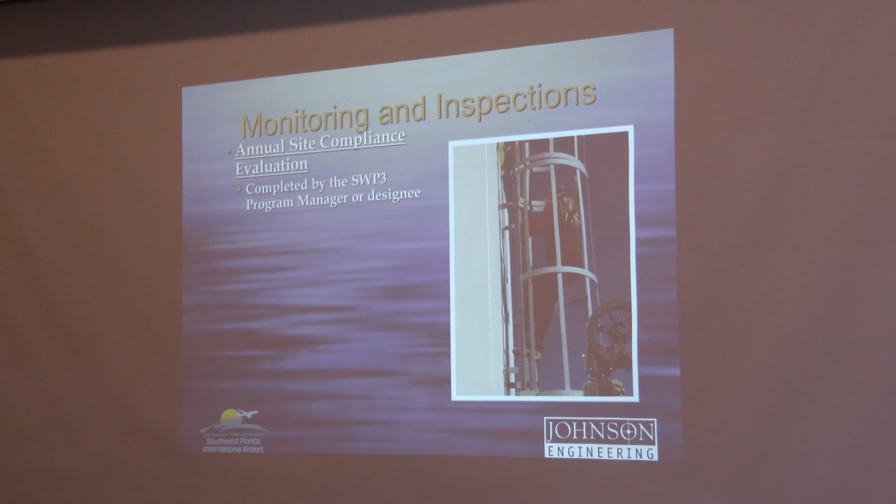On a cold day in January, I rode along with Alicia and met with LCPA staff around the airport property to evaluate how well you guys are doing. And overall, RSW looked great. You're implementing the SWIP as necessary. We reviewed the effectiveness of the SWIP and completed a comprehensive inspection of the airport. The evaluation included an evaluation of control measures and a review of previous inspections.

During those inspections, just like you guys, we have to have our forms that we fill out, and these forms are used to evaluate the control measures for effectiveness, and they are kept on site with the SWIP for a period of 6 years.

The annual site compliance evaluation was emailed to the PPT, and it was made available to the tenant on the tenant website, so everybody here should have received a copy. We also use this opportunity to summarize necessary changes to the SWIP and to suggest corrective actions to anything seen during the evaluation.

So similarly here, if you guys see something that needs to be changed in the SWIP, just provide that information to Alicia, and we'll have that updated so that when the inspectors come, we've got a nice up-to-date document. The evaluation is signed and kept with the SWIP for inspection purposes, and records are maintained for 6 years.

Finally, we're going to move into the administrative provisions of the SWIP. Most of this stuff is done by the environmental compliance manager, but it is with input from you guys and consultants alike. Updates to the SWIP can and should occur throughout the year. Updates include any staffing changes that may affect the PPT and any new or discontinued activities that may affect the SWIP. If you see anything that could change the SWIP, including staffing changes, please let Alicia know.

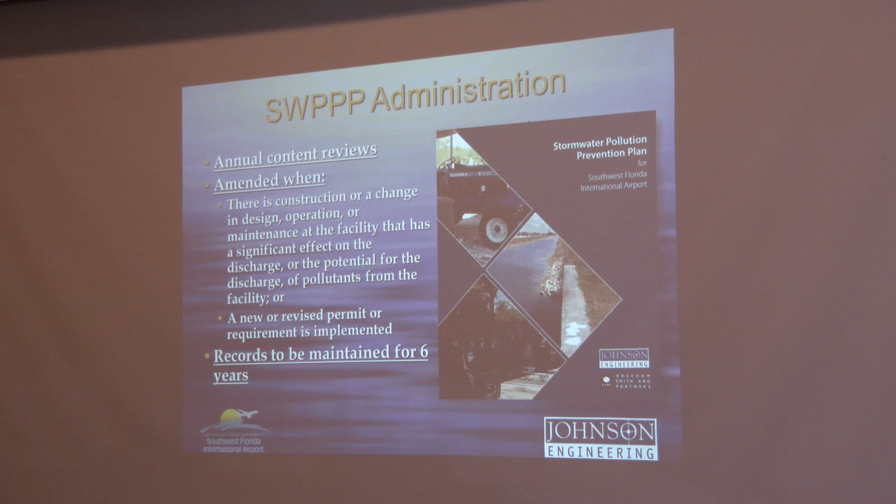Please remember that the SWIP training and education information needs to be disseminated to all service staff. It's the manager's responsibility to ensure that everyone who needs annual training receives it. If there are questions about who needs to receive that training, please contact Alicia. And on that note, please make sure that everybody signs the sign-in sheet. That's included into the SWIP and is part of our regulatory requirements.

Sometimes it's difficult to notice when the offensive line does their job really well, but it's painfully obvious to notice when they don't do their job well. The SWIP, the pollution prevention team, and everybody here today acts as a part of our offensive line, the unsung first line of defense keeping pollutants from entering our waterways.

It isn't a job that can be done now and then or on a few plays of the game. It has to be done and done well every day. It has to be done by everyone associated with the SWIP, even if they have separate jobs, and we all rely on each other to communicate the different needs as they come up. And like the offensive line, there may not be a lot of excitement when things are running well, but it can get all too exciting when things go wrong.

So personally, I thank you for taking pollution prevention as a serious part of your everyday tasks. Thank you for lining up every day and doing your part, and thank you for working to ensure that we have a clean environment.

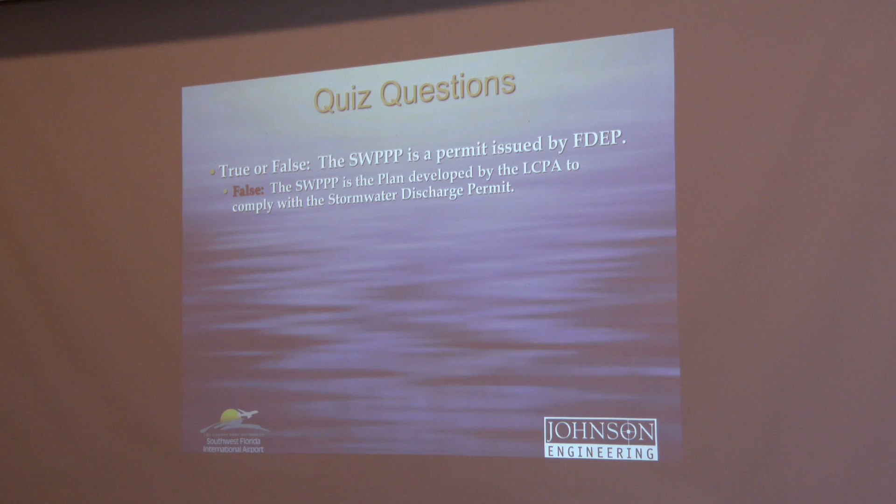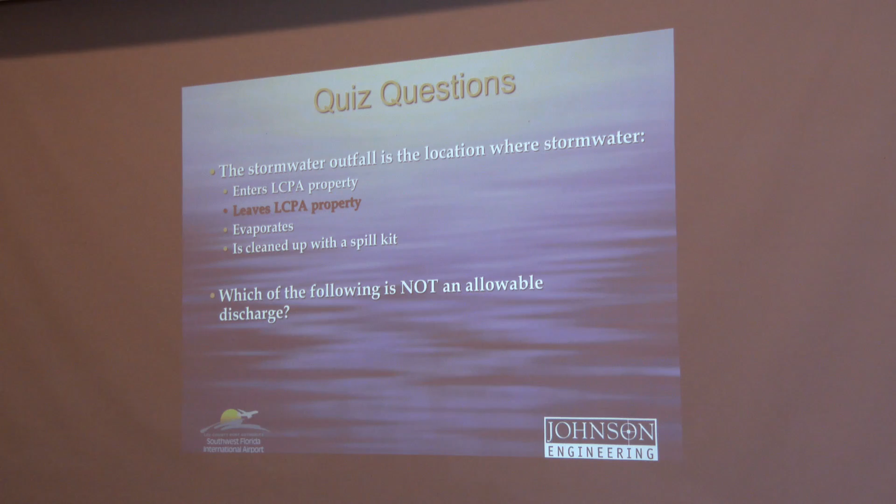Excellent. All right, which of the following is not an allowable discharge? You're going to have to read this one. Is it equipment wash water that is collected and discharged to a sanitary sewer? Is it irrigation water? Is it pressure wash water with biodegradable soap additive or compressor condensate? Which one? Pressure wash. Why do you say that? Because it's got soap. Excellent.